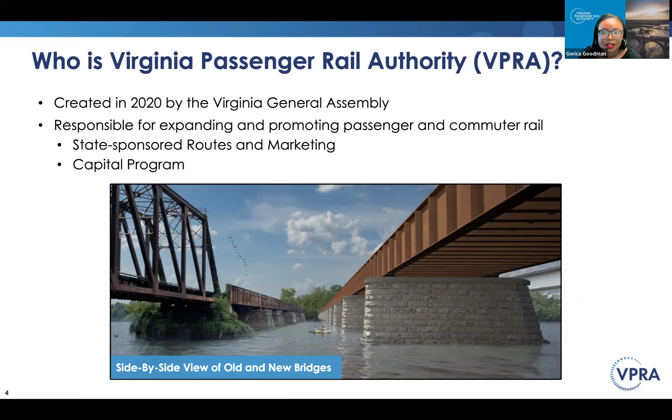Like I said, we manage Virginia's passenger rail network, which includes 4 state-supported Amtrak routes with 8 daily round trips to Roanoke, Richmond, Newport News, and Norfolk. It also includes 5 Amtrak long-distance routes that go through our state, 1 North Carolina state-supported round trip, and 2 Virginia Railway Express commuter routes with 16 daily round trips, the Manassas line and the Fredericksburg line. So we have a very robust rail network in Virginia, which will only grow after we complete the Transforming Rail program, which the Long Bridge Project is a critical component of.

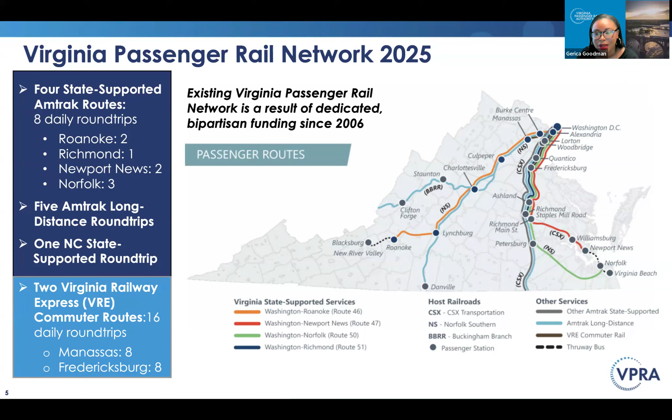The VPRA Capital Program includes 11 projects in the DC to Richmond area that will unlock new passenger rail service. Long Bridge is a critical linchpin, creating a new 2-track railroad bridge over the Potomac, but also other rail bridges in DC and connecting in Virginia in Arlington. It'll add 2 new Amtrak round trips and 3 new VRE round trips, plus late night and weekend service, and future capacity for an additional 3 new Amtrak round trips and 2 new VRE round trips.

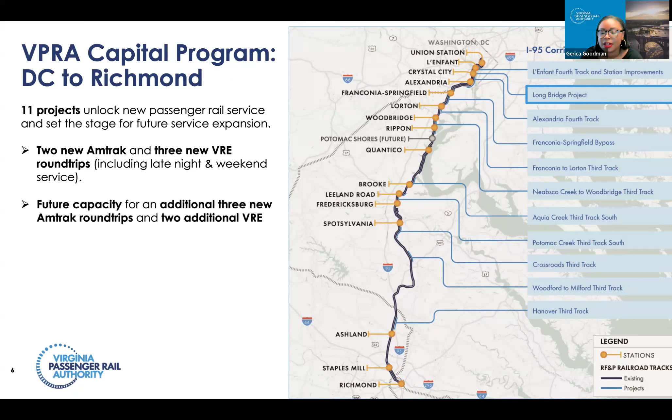So Long Bridge, while a very important project, is one piece of a very complex infrastructure program that will significantly expand passenger and commuter service for not just Virginians, but anyone traveling up and down the Northeast and Southeast. These projects will unlock a tremendous amount of service. Now I'm handing it over to Naomi.

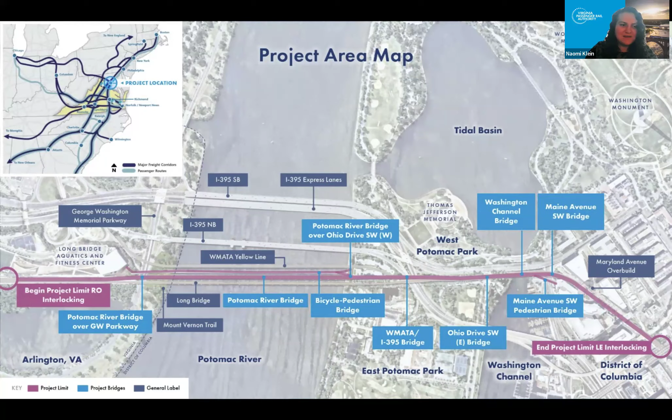The existing Long Bridge will continue to be owned by CSX. The new rail bridge will be owned by VPRA, the state of Virginia, and the bicycle pedestrian bridge across the Potomac River will be owned by the district, constructed by us as part of this project, but eventually owned by the District of Columbia. So we can go to the next slide.

These are just some facts about the Long Bridge project. You'll see there are a lot of bridges going across the Potomac River, labeled by color. On the far left with the orange label is the 14th Street Highway Bridge.

And then there's the WMATA Yellow Line Bridge labeled in yellow. This is a rendering of what the project is going to build. In green is the new bicycle pedestrian bridge that we will be building as mitigation for the project. With the purple label, the new 2-track Long Bridge, and on the far right, the existing Long Bridge that will continue to be owned by CSX. So you can see some facts: 2 new tracks, 3 rail operators—VRE, Amtrak, and CSX—5 new rail bridges, and 2 new pedestrian bridges.

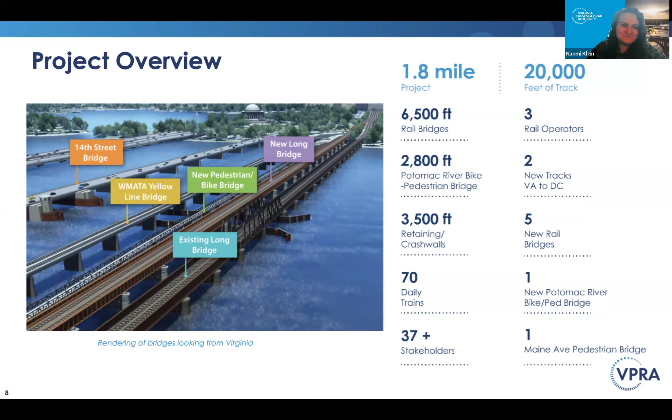So we can go to the next slide. While it is one project for the purposes of construction, just due to the size and complexity of the project, it is split into 2 packages, a North package and a South package.

The South package handles everything in Virginia on the Arlington side, and then the largest bridge that goes across the Potomac River and the bicycle pedestrian bridge. The South package ends basically at the abutment of the bridge at Ohio Drive near the river in East Potomac Park. From there, the North package picks up everything within the district—everything in East Potomac Park, across the Washington Channel, and up to LE interlocking.

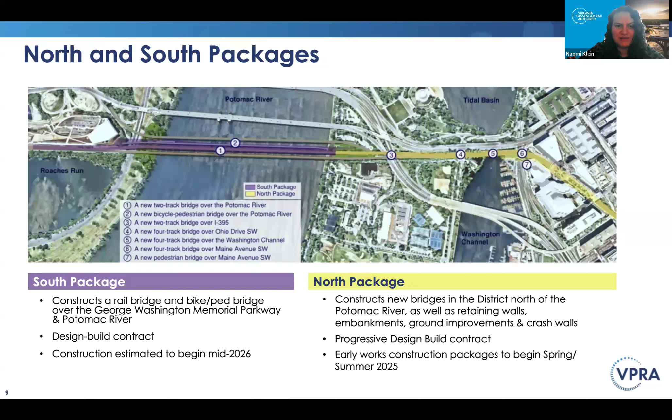The South package is design build, and that design builder came on board earlier this year, about a month ago. The North package is what we call progressive design build, and they came on board about a year ago, and they are progressing their design from 60% to final design.

That environmental process concluded in 2020 when the Federal Railroad Administration issued what's called an Environmental Impact Statement and Record of Decision. Essentially what that did was capture what any of the impacts were to environmental or cultural resources, and then lay out what the mitigations or commitments of the project would be to address any of those impacts. Once that environmental process concluded, DC handed the project over to Virginia to complete design and construction.

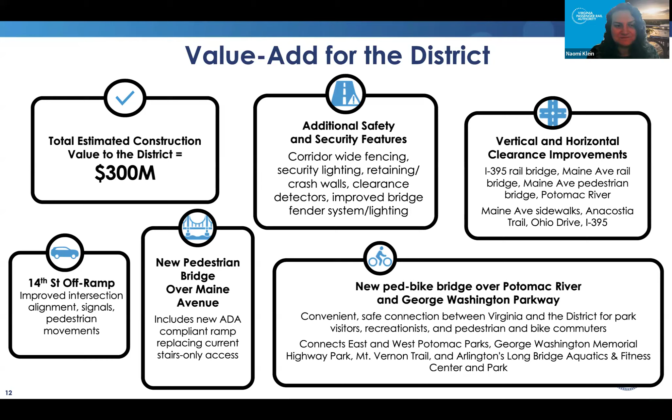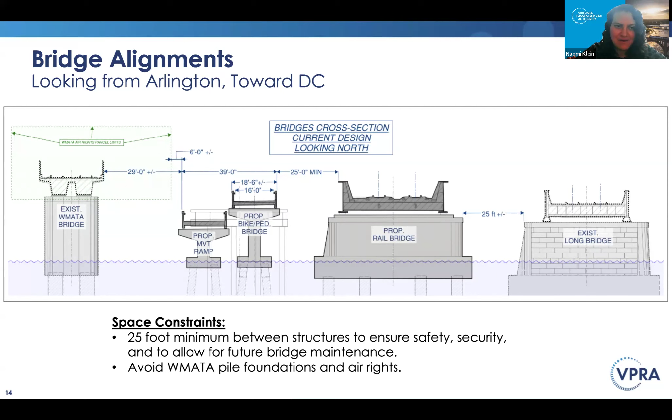So this just shows you that we are putting a lot in a very small space. As you probably saw from some of the renderings, we've got the existing Yellow Line WMATA bridge, and then the bike pedestrian bridge that will be 16 feet wide and ramps down to the Mount Vernon Trail. We've got the new 2-track railroad bridge and the existing 2-track Long Bridge. Additionally, you need space between each of those bridges to get equipment in to maintain them, and also for security reasons.

I'll add that the new bicycle pedestrian bridge connects to a trail that brings you to Long Bridge Park and the Long Bridge Aquatic Center in Arlington. It also includes a connection to the Mount Vernon Trail in Arlington, and then in the district, it brings you to East Potomac Park to a bike lane on Ohio Drive.

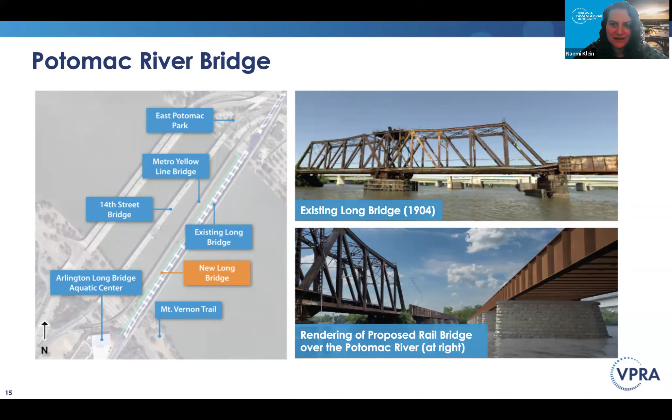This is a great benefit because this sidewalk is actually part of the Anacostia Riverwalk Trail, so this is going to give a lot more space for pedestrians and cyclists to be able to connect to the tidal basin.

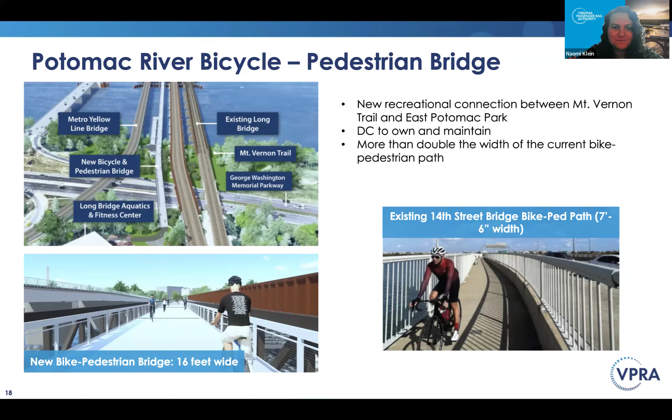There is a project that NPS is working on now where they will be widening the Mount Vernon Trail at this location from 8 feet to 11 feet.

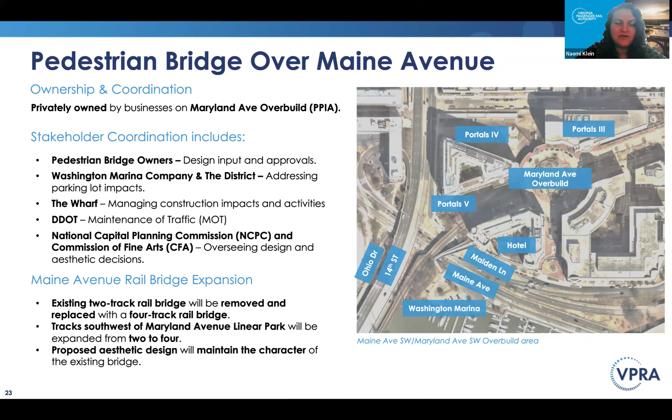Okay, so the purpose of that—can you go back to that slide? This slide is to introduce the fact that there is a pedestrian bridge that crosses Maine Avenue. And this project, because we are widening the rail bridge over Maine Avenue from 2 tracks to 4 tracks, that pedestrian bridge is directly in the path of where the new 4-track rail bridge will have to go. So we will need to remove that existing pedestrian bridge in order to build the new rail bridge. We have a concept where we intend to replace that bridge. That bridge is privately owned by the businesses located on the Maryland Avenue overbuild, known as the PPIA.

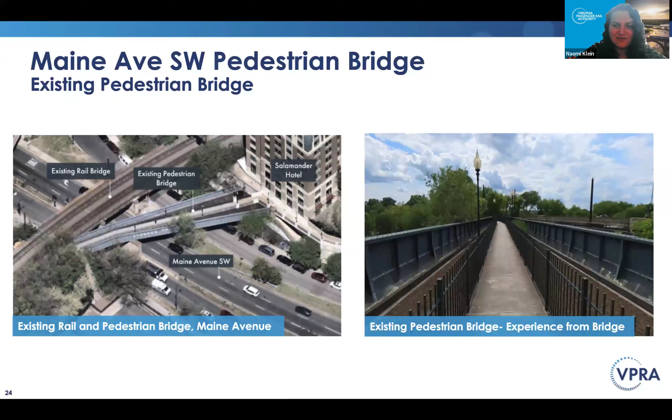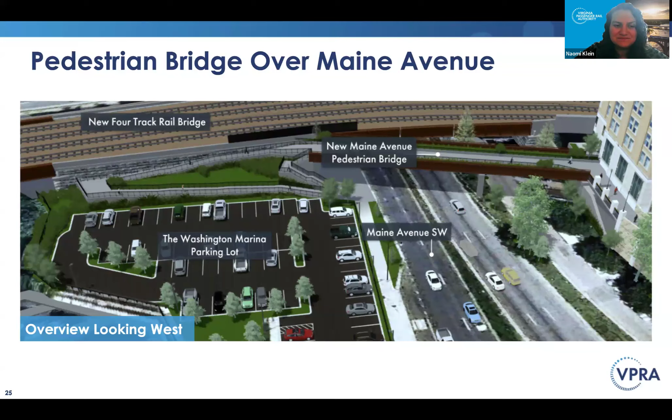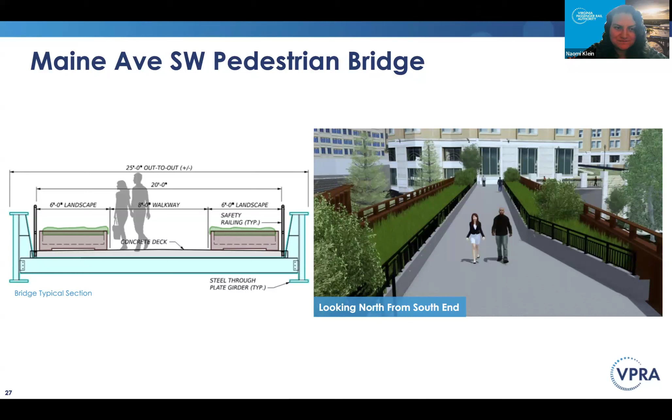So this just gets into a little bit of what is happening now. Ian, do you want to jump in on this, or do you want me to keep going? Yeah, go for it, Naomi.

As we mentioned, we're doing some early works activities. These are smaller activities that we can do in preparation for full construction of the project. We've been doing some archaeological testing, essentially doing soil cores to see the likelihood of finding any artifacts, and doing some test pile driving, which helps inform the design of the piles that will go in the water and support the bridge structure itself. We've been monitoring vibration, doing some borings in the river and test piles, and some minor tree and brush clearing just to be able to access different locations for this early work.

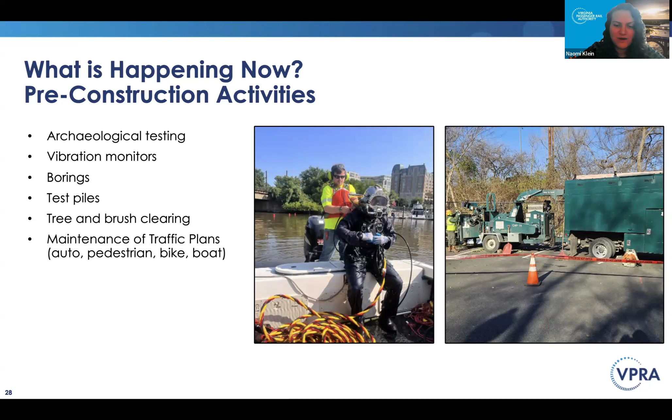And we've been working very closely with DDOT on our maintenance of traffic plans. While I know we're not going to get into that in detail today, the idea is that in the next meeting we will be able to bring some of those details to a larger audience, but we are coordinating very closely with DDOT on those plans.

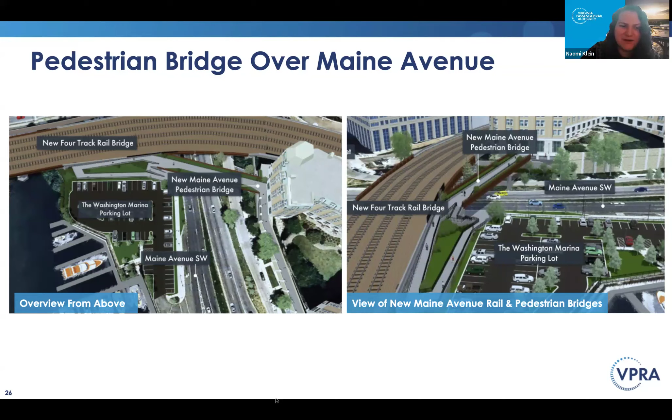Great question. As far as when construction is expected to start, we are finalizing design right now. Last fall we hit the 60% design milestone, and we're advancing to 90 and 100%. Right now we're doing some early works construction, which is early prep activity like utility relocation or test shafts, doing some geologic testing of the ground. As far as when we'll begin full construction, it's like fall or by the end of this year.

There will be some impact, and we are coordinating with DDOT on the overall maintenance of traffic plan. I don't want to get into too much detail because we're still working through it with the district to make sure it's a plan they're acceptable of. But there will be some lane closures on Maine Avenue, and I also know there will be some impacts on Maiden Lane as well.

As far as your question surrounding the noise, we are working with Amtrak, CSX, and VRE to determine what work can be done during the day and what is the quietest work that can be done at night, figuring out those work windows. I realize these answers aren't necessarily the exact specific details, but at the next CAG meeting we'll have a lot more specific details to answer those questions. There are going to be traffic impacts, and our goal is to get out ahead of those by starting this conversation now, and then sharing specifics once we know them. You may have seen there's already been some minor traffic impacts—for example, we might need a lane of Maine Avenue closed from 11 to 4 for a couple of days.

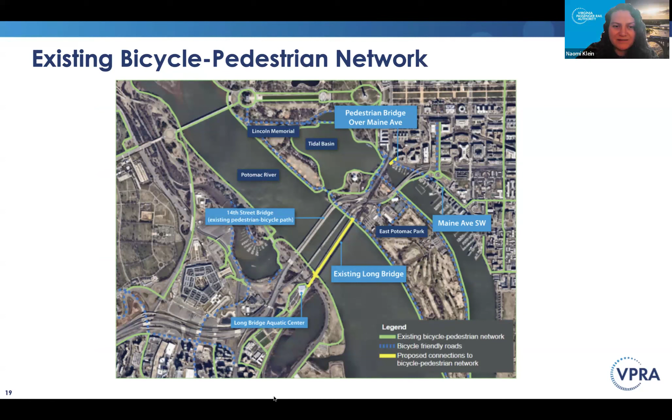Oh, okay, so can we go back to the visuals of the connection points? So this is at Long Bridge Park Trail, the connection point is fully separated from vehicular traffic. Okay, and then can you go to the Mount Vernon Trail? This is also fully separated from vehicular traffic, there's no vehicles anywhere nearby.

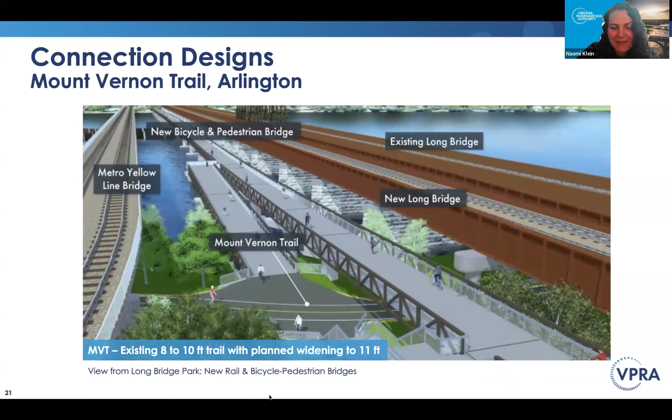And then if you can go to the Ohio Drive landing, this does have a railing, because to your point, cars could go across a bike lane. Oh, too far, let's go back to that previous one. All right, well, I'll keep talking while we work on that. There is a railing where that drops you, to your point of vehicles being able to jump the curb.

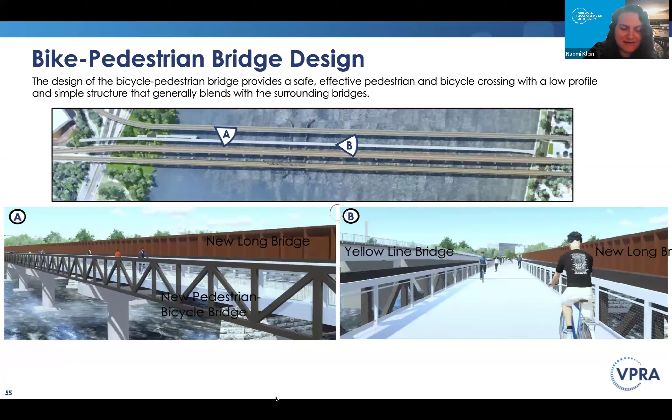So I guess if the question is could that railing go further, we can definitely look into that. Okay, I've just seen both very confused tourists do wild things and also very reckless drivers do wild things. Understood, yeah, it's always a concern. Yeah, I appreciate the concern, and that's definitely a note we can take back.

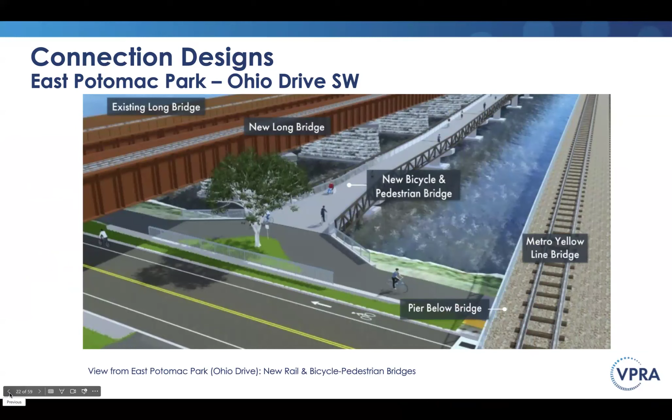Great, thanks, yeah, I also want to associate myself with Catherine's comments. It's great, I'm super excited about this entire project. Underneath, in the crossing of Maine Avenue, some of the supports for the existing rail bridge impinge on the sidewalk, so it's definitely not ADA compliant. I just want to make sure, thinking about the majority of people with disabilities who don't own or operate a car, that they're accommodated both after construction and during construction.

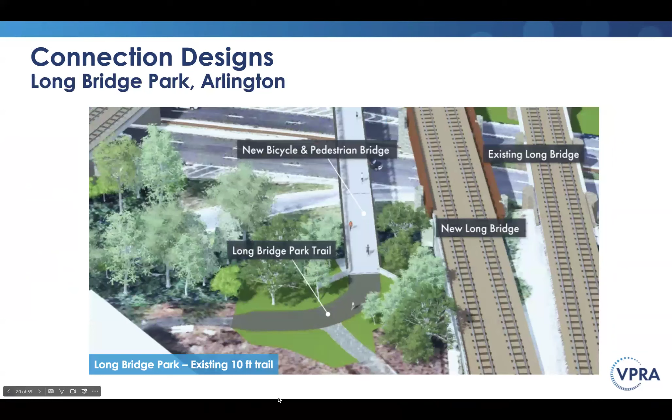So after construction, for sure, that all of the sidewalks that are going to be impacted by the new bridge and the old, and everything that's being constructed, anything that we touch, it's going to bring up to ADA compliance.

And then also on the MOT side with DDOT, they have a nasty habit of closing sidewalks but not closing car lanes. So when this happened on Rhode Island Avenue, there was someone crossing the street because they were forced to with a closed sidewalk on a major arterial street, which Maine Avenue is, and there was another person who was killed.

I'm really thinking through people outside of a car. During construction, DDOT permitted DC Water to close a sidewalk on Rhode Island and someone got killed. Even though DDOT will give you a permit to close the sidewalk, even though it's against their last resort guidance, it should not be done. Creating a safe accommodation is critical, especially given how long it takes to cross, or the distance of Maine Avenue you can walk without any ability to cross the street. There are going to be people who need to cross. If we're not going to make that pedestrian bridge a viable option for people to cross, both during and after construction, but especially during construction, we need to be thinking about people with disabilities.

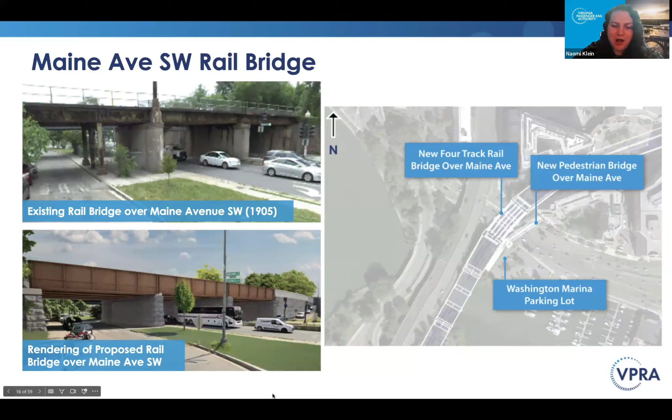On the Maine Avenue pedestrian bridge, right now we are proposing that during construction we would provide a temporary pedestrian bridge that would also be ADA accessible. So you'd be able to cross Maine Avenue on a pedestrian bridge for the duration of the project. It just won't look as nice and fancy as the renderings of the new bridge we're showing you.

On your point about car length and sidewalks, I can tell you we will have to close some of the sidewalk in this area. The reason is that a lot of our staging to construct the rail bridge over Maine Avenue has to happen from the Washington Marina parking lot, which means we'll have to construct a truck entrance to that staging area, with trucks essentially going over the sidewalk. But as part of our MOT, in areas where we have to close the sidewalk, we will be providing a sidewalk in the roadway. We'll also have to take vehicle lanes as well, so it's not only pedestrians and cyclists who'll be impacted—all modes will be impacted at some point.